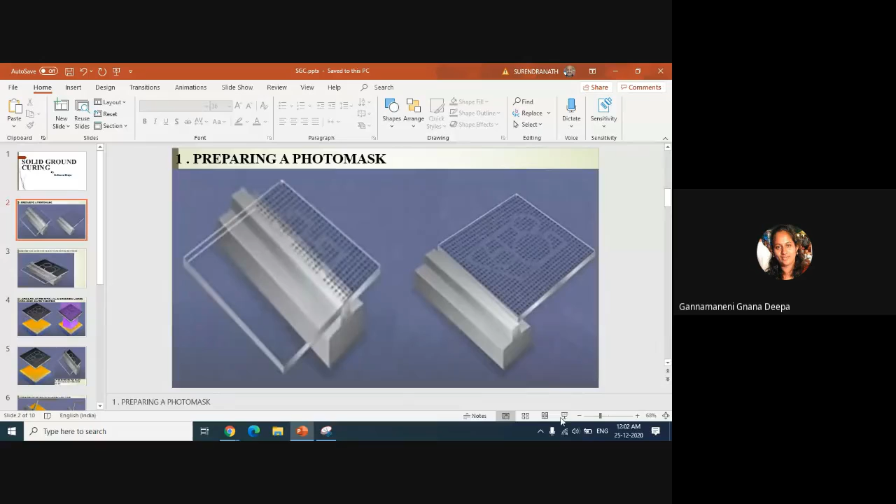Today I am here to teach you solid ground curing. It is one of the additive manufacturing processes. This is a liquid based additive manufacturing process. It is also a rapid prototyping technology.

As we know, additive manufacturing has other names, called freeform fabrication and rapid prototyping. If we talk about the technology we are using in additive manufacturing, it is 3D printing technology. So these are the names. So now we are discussing solid ground curing.

It is a photopolymerization based additive technology. This is one of the processes in liquid based additive manufacturing systems. That was in our first unit. In this technology, we have only two printers available: Solider 4600 and Solider 5600. These two printers are the only printers available under SGC.

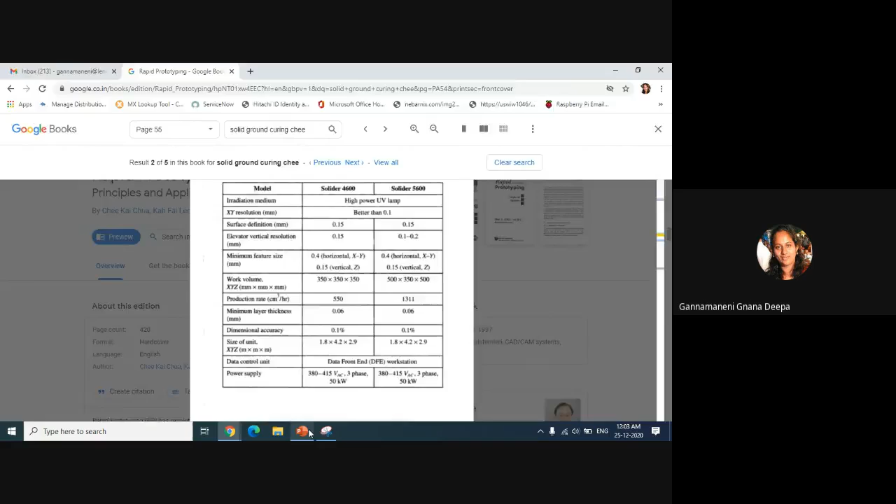This technology was introduced by Cubital Incorporated Limited, Israel. This process was introduced in 1987, and this is also a photopolymerization based technology. So, what is solid ground curing? Solid ground curing consists of a print bed and a platform, an ultraviolet lamp for curing, a liquid photopolymerable resin, and a wax material that acts as a support material.

As we know, in layering technology, a CAD design is created, and that CAD design is saved in a .stl file format, standard tessellation language, and that .stl file is imported into a slicing software. This slicing software slices the 3D model into 2D patterns. The slicing software communicates with the 3D printer, and the first sliced 2D pattern is printed.

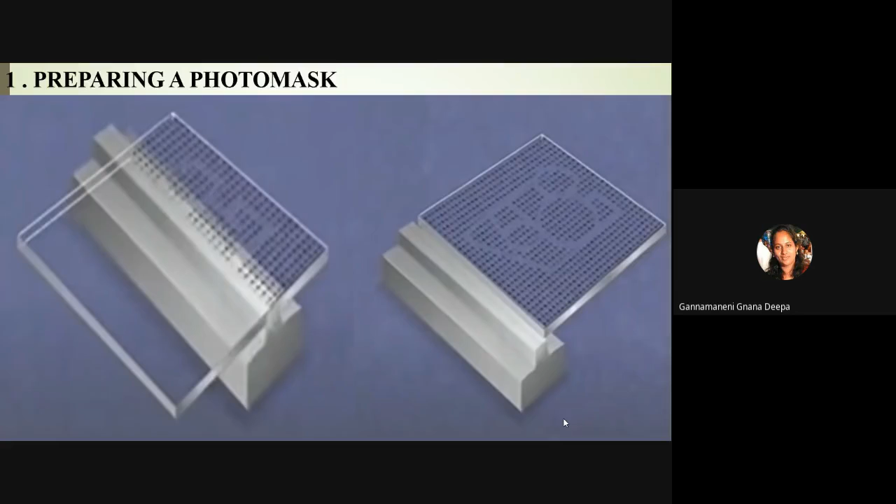This glass plate is passed under the toner. This toner equally distributes the liquid dots by uncovering the contoured area. Here we can see the contoured area. That contoured area itself is our 2D pattern that is sliced in the slicing software. This is how the photo mask is prepared.

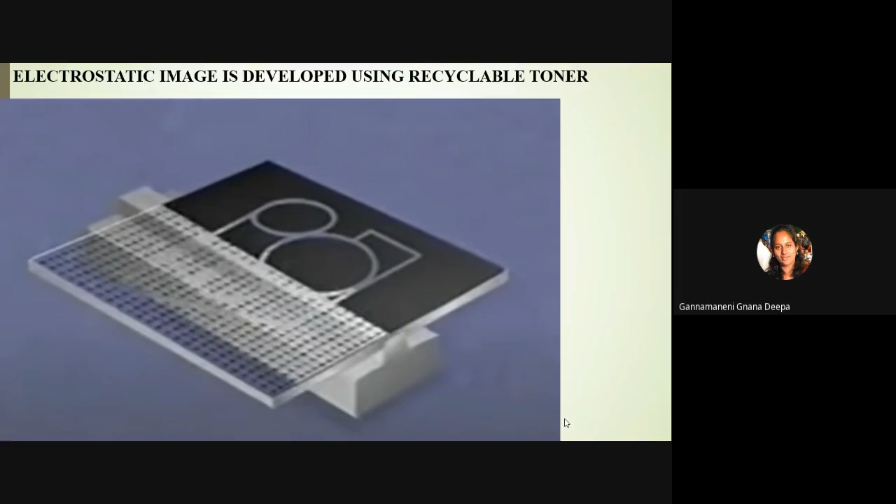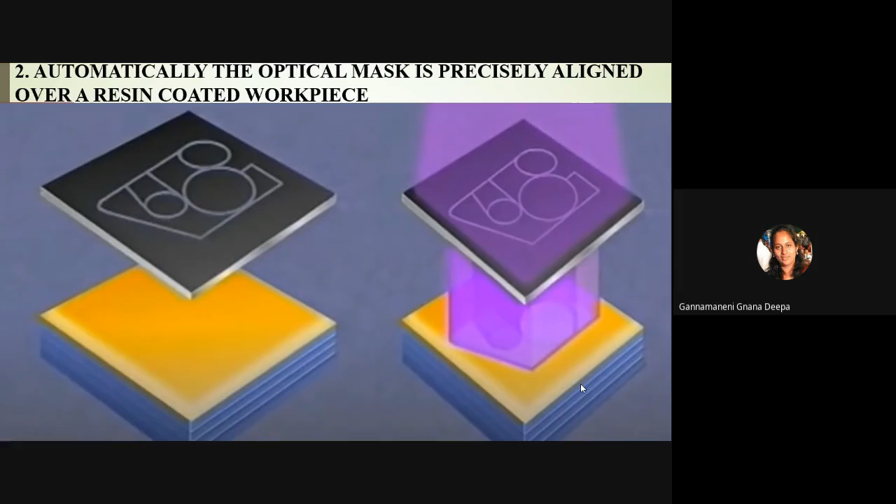Because obstacle material is equally covered over there, and the contour shape is clear and transparent, the UV rays pass from that contoured area towards the resin only. Everything beyond that contoured area will remain as liquid resin. When the UV light comes in contact with the liquid resin through the contoured area, only that area will get solidified. The entire remaining masked area will remain as a liquid.

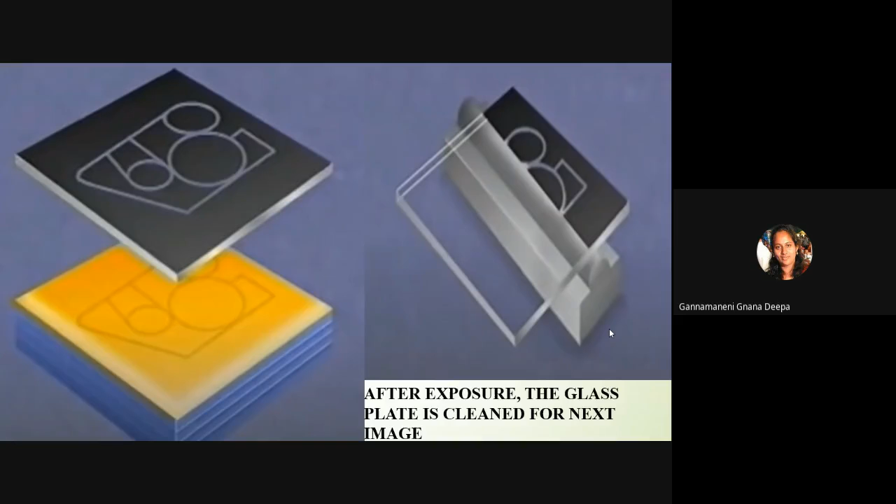Before going to the next step, after the exposure, the glass plate is cleaned for the next image. Here in the slide, we can see that process. For the next process, the workpiece moves beneath the aerodynamic wiper, or we call it the vacuumification process. The workpiece with the unsolidified and solidified resin moves under the aerodynamic wiper.

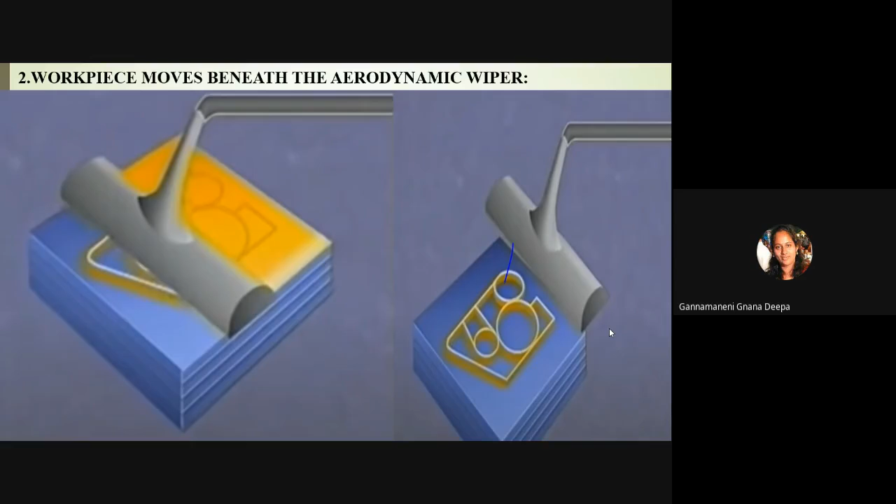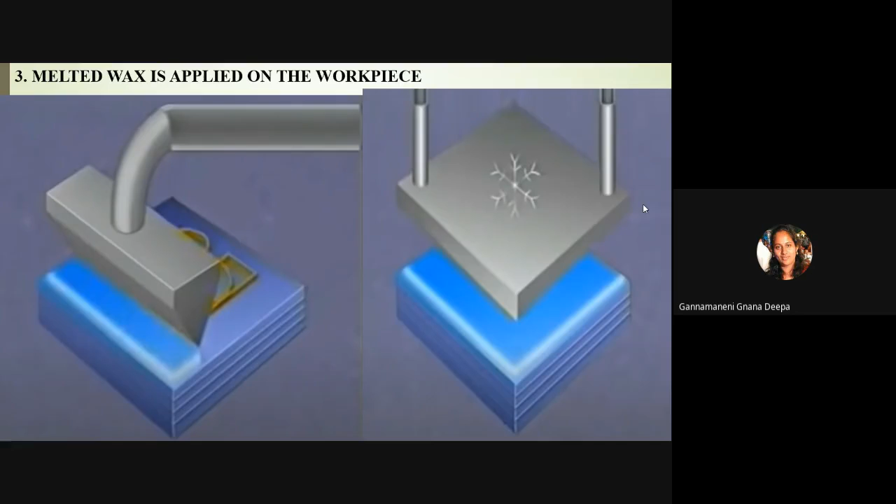That aerodynamic wiper sucks the liquid resin and leaves the solidified polymer. Here we can see the diagram. After the vacuumification is done, the next step is melted wax is applied on the workpiece. In the left side diagram, melted wax is applied on the workpiece, and that melted wax is instantly solidified using a frozen plate. On the right side diagram, we can see a very cool plate aligned over the melted wax.

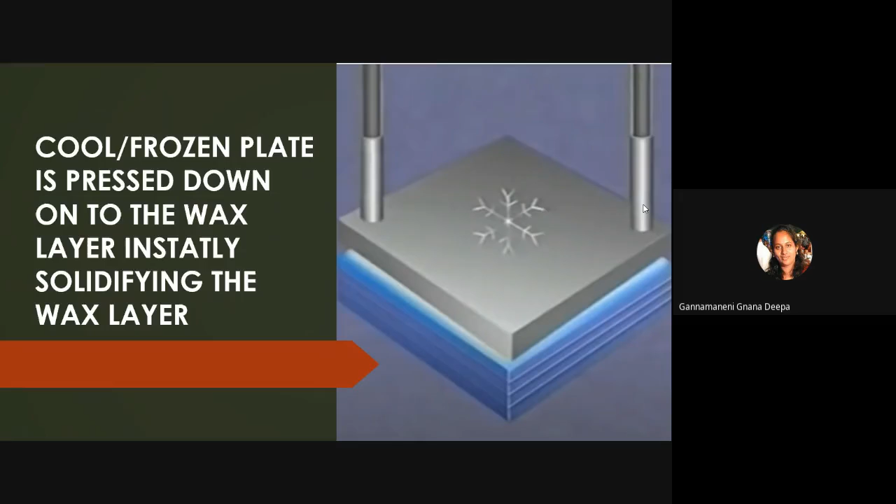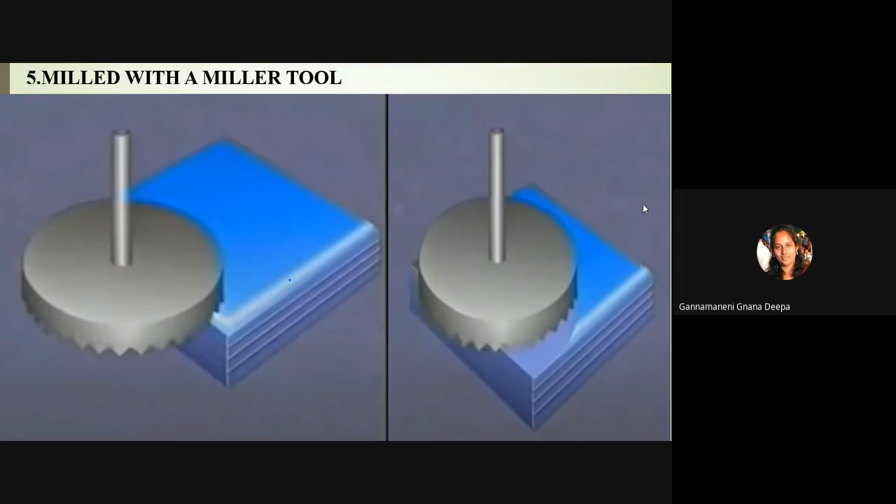When this cool plate is aligned above the melted wax, it instantly solidifies the wax layer. After solidification of the wax, the entire workpiece with solidified resin and solidified wax is milled with a miller tool. The miller tool has blades on it. It flattens the surface until the required flatness is achieved. We have to do the surface finishing using this miller tool.